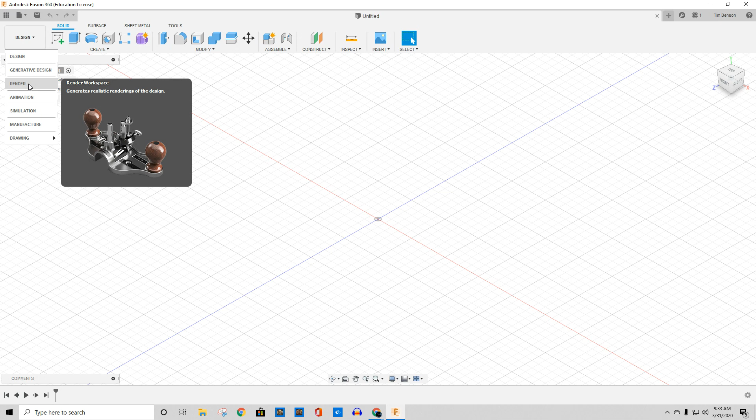We can do design, we can do generative design, we can do renderings, which I understand does pretty good renderings - I haven't played with it yet. We can do animations of how things come together, be taken apart, move, etc. We can do simulations just like we can in Inventor. There's also manufacture - it literally will lay out the tool paths for a CNC machine to cut this. And then it'll supposedly produce drawings from a design or from an animation.

So as we're working our way through this, to a certain extent, this is very new to me, but we're going to test it out. We're going to figure out how it works.

Right now, I'm going to basically show you how to make an extrusion. I'm going to show you how to make the base plate for the wheel that we've all done 15 times so far. So I'm going to push my mouse wheel down and pan. I'm just panning over.

I'm going to work in this. This is the first quadrant. If we're looking at this thing, if I turn it, let's turn it top side to me. Actually, this is the first quadrant, so I'm going to move this. So my first quadrant's here - there's my origin point right there.

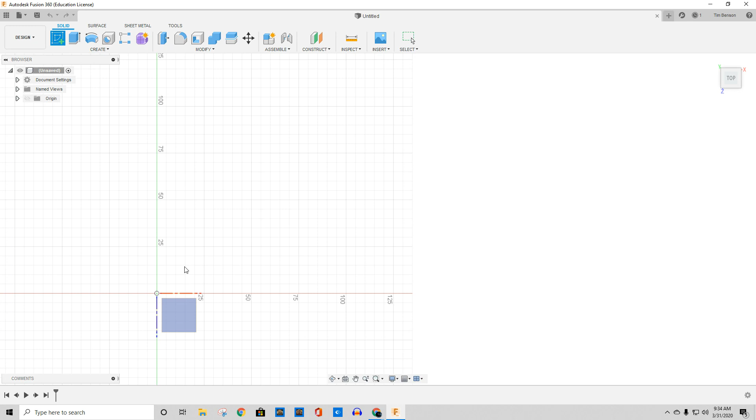Okay, so I'm going to move that, and I'm going to draw in a box. I'm just going to start a sketch, and I'm going to try to draw - let's see if this works. There we go, so I picked a plane apparently, and I pick a box here and drag it up.

Now this is doing it in millimeters, so what I've got to do is some math real quick. So it assigned that out. Can I put a dimension on here to control it? I don't know, let's find out the hard way. Oh, that's doing a freehand sketch. So this line - ooh, this is new - I want to know how to specify its size here.

Sketches - there's my sketch right there, sketch 1. Can I do anything with it? Ooh, I want to put a dimension on this to control it. There's the dimension. So that's 100 millimeters. Well, this needs to be 3.5 inches across, okay?

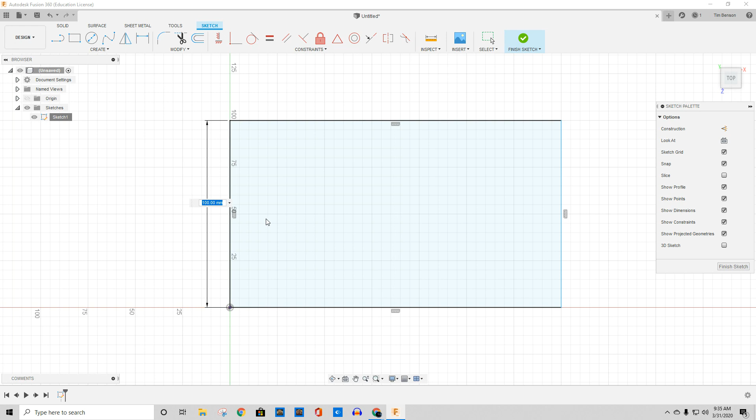So if I'm looking at this and I go 3.5 and multiply that by 25.4, that tells me how many millimeters I've got. So that should be 88.9 millimeters. So I'm going to go 88.9. Okay, shrunk it. So if I go 5.5 inches times 25.4, that tells me how many millimeters right to left. So if I put a dimension on this side right here, that should be 139.7 millimeters.

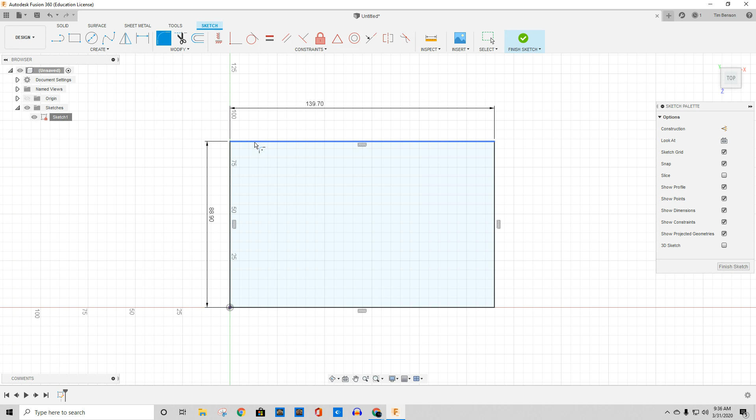Good question, huh? Okay, there's a fillet right there. I want to fillet between this and this, but I want to specify it. That's supposed to be a half inch, so 0.5 times 25.4. That's 12.7 millimeters.

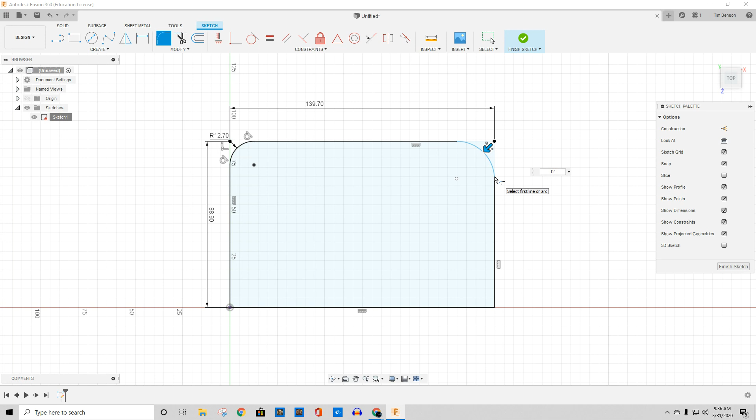Will it do the same thing over here? Oh, I've got to go back to the fillet tool apparently. Again, 12.7. Back to the fillet tool. 12.7. Back to the fillet tool again. There he is. Now I'm going to finish this sketch.

I probably ought to put the holes in it while I'm thinking about it. I'm going to come in here and snap to that point with the circle tool, drag that out. That's a 0.375 hole, which is 9.525 millimeters. So I'm going to literally type in 9.525 right there.

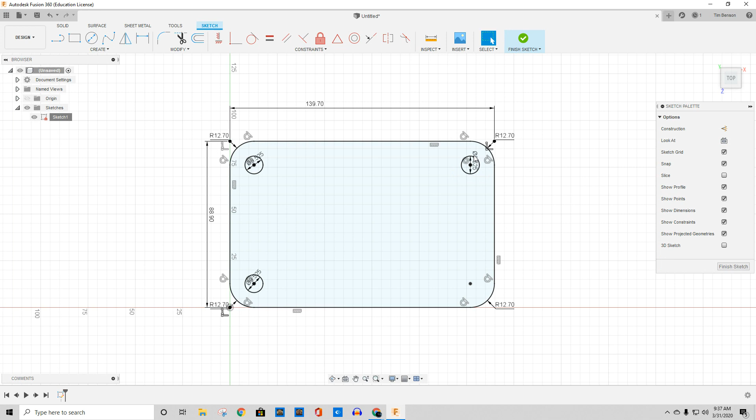I'm going to do the same thing three more times: snap that origin, 9.525. Yes, that guy, snap the origin, 9.525. Okay, one more time. Snap, 9.525. Okay, there he is. So I'll hit finish sketch here. I've got him. Now I'm going to turn this so it's isometric to us again.

I need to stretch him, so I'm going to use the press pull. Okay, select. There it is, got it.

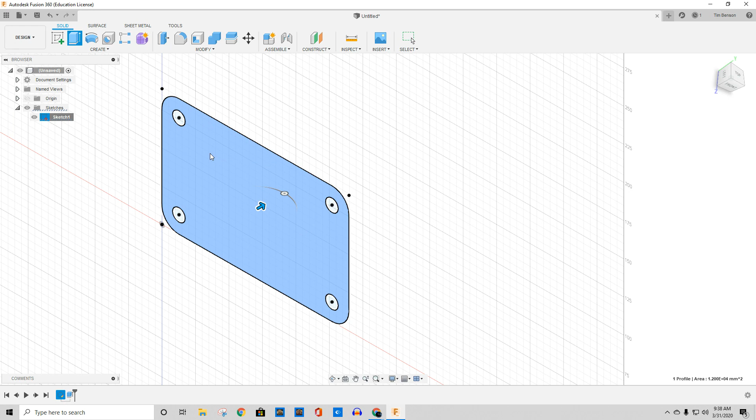Now, that's supposed to be 0.625 inches across total, times 25.4, which means it's 15.875 millimeters. So I'm going to type in 15.875. Hey, it looks like I've generated a block.

Sweet, so there's my first piece of my support. Now the only thing I have to do is make a cut on it. I don't know how to do that right now.

Let's figure it out. So if I go select this surface and tell it to sketch on it. Where's my sketch? Create, sketch. Ha! So rectangle tool, bring it across like this.

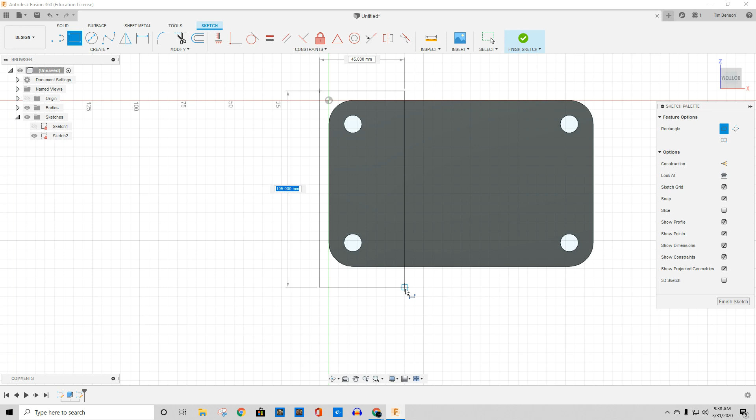Now let's see if I can put a dimension on there. This could be entertainment. From this edge to this edge should be, pull that up, depends on which side of this I'm working on. Let's go 1.5 on this one. So 1.5 times 25.4 gives me 38.1. I'm going to go ahead and do 38.1 there.

I'm going to do the same thing over here. I wonder if I can do them both in one go. We're going to find out the hard way. So I'll put another dimension from this edge here to that edge there. Okay, and that's 38.1.

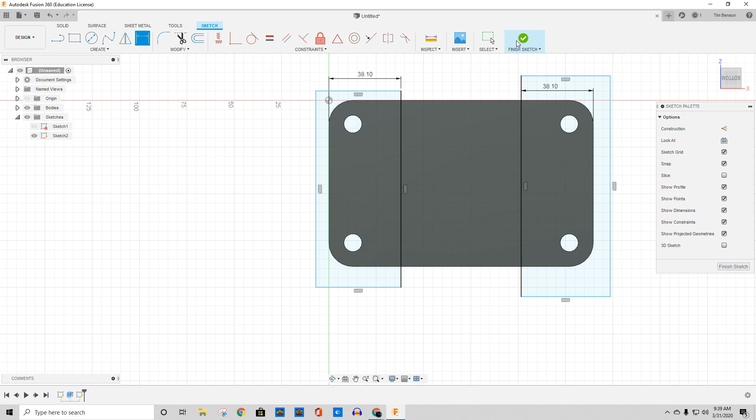I'm going to finish the sketch. Okay, I think it's thinking about it. There it goes. All right, now I want to do a...

This could be entertainment. Okay, let's try the press pull of this shape, this shape, this shape, and that shape. And it's going to go an eighth of an inch, so that's 0.125 times 25.4. That gives me 3.175.

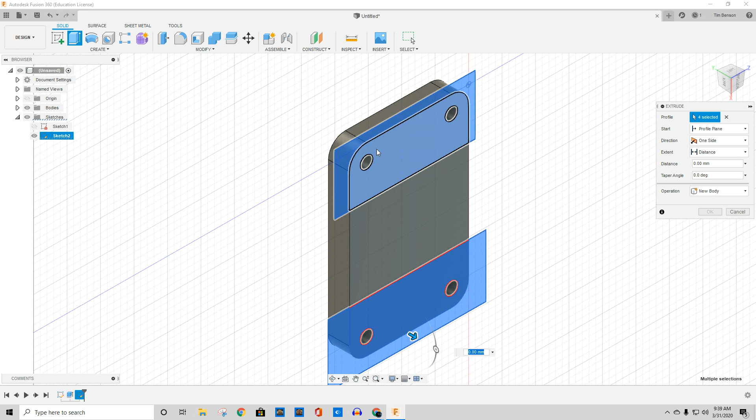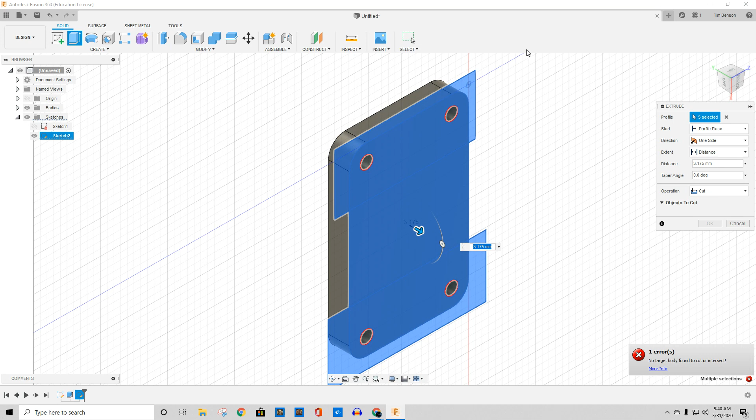I want to go with, well, I want to do a cut. It doesn't like me. Nope, I don't want to do that. Cancel, cancel. Well, let's try that again. It will work, I just got to figure out how to make it work.

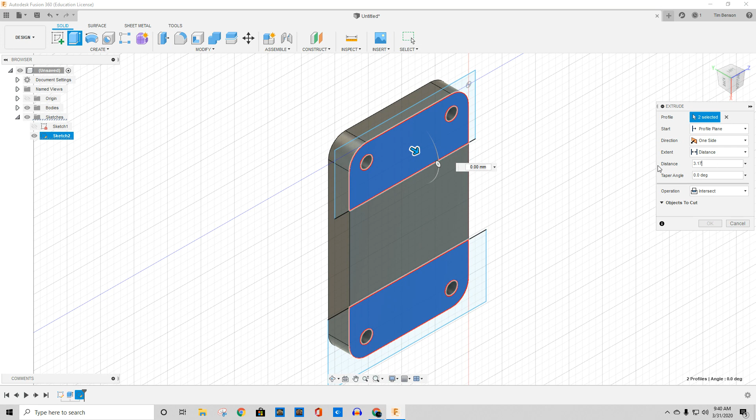So I want to take this shape and this shape, and I want to do a cut. And that was 3.175. Aha! Minus 3.175. Not intersect, cut. Whew, got it.

That's it. Takes a minute to get used to the new interface, but hey, it does the same things. We know the right terms.

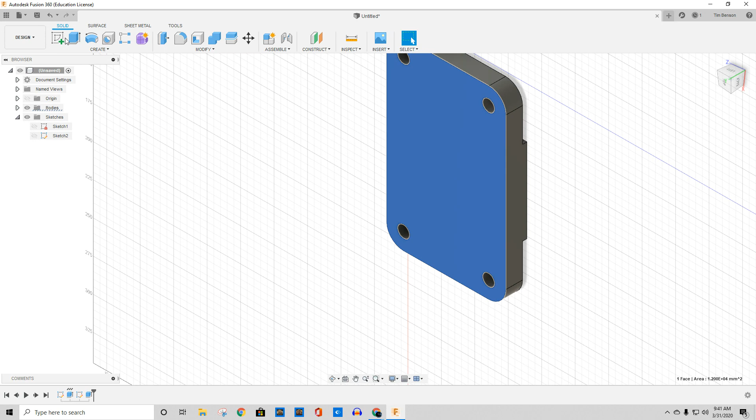So if I click on this surface and select that surface, I want to create a sketch there. Where's my sketch tool? There's my sketch. All right, and I put a rectangle just like this through it.

And I take my 1.75 times 25.4, that tells me 44.45 millimeters over. So I go from here to there, pull that up. I should be at 44.45 there.

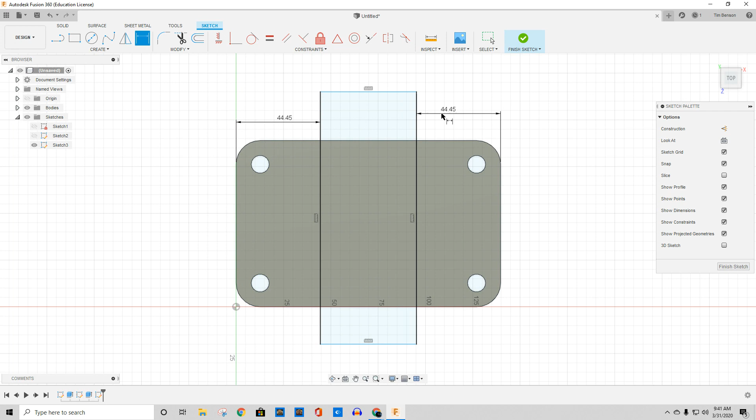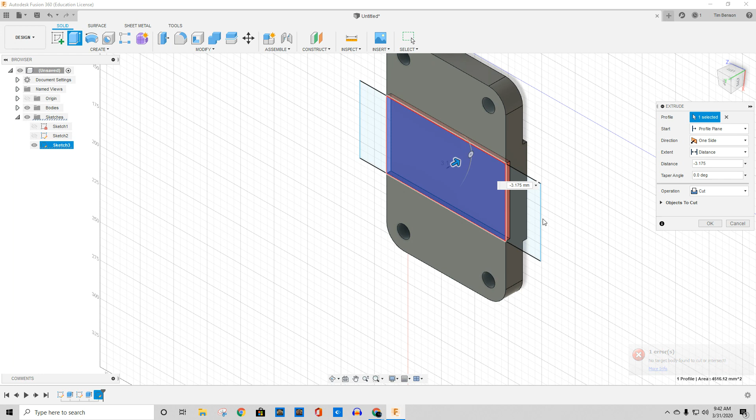And if I go from this edge here to that edge there, 44.45 here, enter, finish that sketch, take and say okay, press pull, well this shape, and tell it to go as a cut, and tell it to go 3.175, and tell it to be a negative, because that's how we figured it out last time. We tell it to be a negative, and add that and that to it for profiles. So make sure we cut everything and then hit OK right here. There it is, I've just created the base plate.

Hey, it's really pretty straightforward and easy. Anything we can design, we can come up with. So good luck and have some fun. Bye.